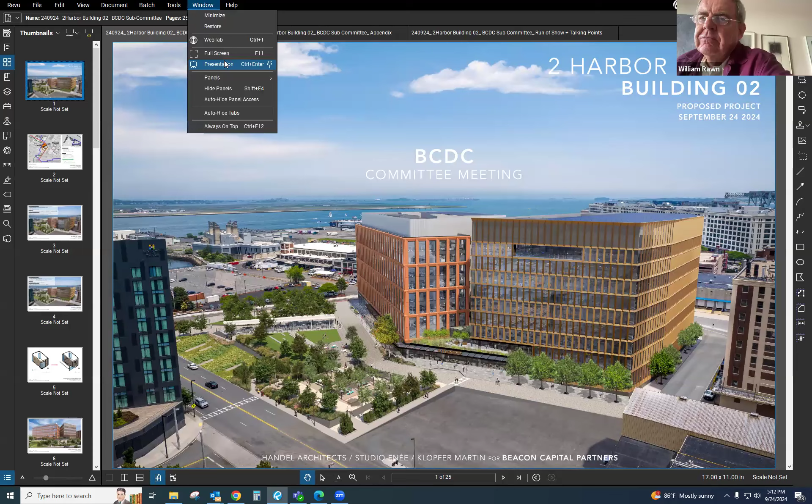I'll get us started, Harry. And I'm Eric Ewer with Beacon Capital. And it's been a little while since we've been in front of you, but we're very pleased to be back in front of you. And I promise we didn't take the summer off.

We've been very busy, and we listened very carefully to the comments you gave us after our first meeting, and it took a little while to digest them. I think most importantly, we took your comments to our landlord, EDIC. And when we had the meeting to talk about keeping the driveway elevated past building 1, past the entrance of building 2, for the various reasons the team will go through based on your comments, everything started. That, coupled with real tenant feedback from the first action we've seen in quite a while.

And that was early summer, late spring, early summer. And then the feedback also from our investors and their approvals to move forward was kind of what was added all together to get the result right here that we're going to present to you. So happy to be back here.

I'm going to turn it over to Eric number 2, Eric Potkin, also here with Beacon, and he'll lead it to the rest of the team. Thanks, Eric. So as Eric mentioned, it's been a little while since we've been in front of BCDC, so just a quick refresher on where we sit on that left map in the larger context of the Seaport area and the Marine Park. And then you can see 2 Harbor Building 1, that's the building that we just recently completed construction on this past summer.

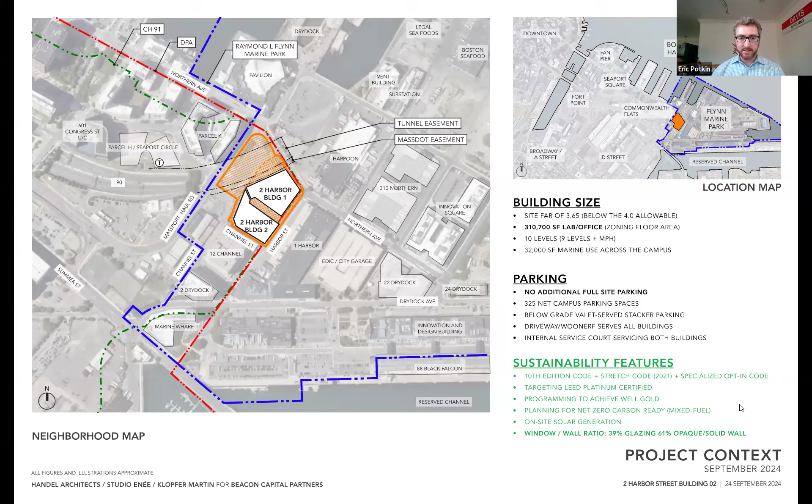So with that context, I'll turn it over to our design team from Handel to start walking through some of the details. Good evening, commissioners, it's Blake Middleton. How are you all? I think we're going to try to summarize.

There were a number of comments that we received in our last meeting with the full commission, and we tried to compress what we understood to be the most urgent and salient ones that would affect our thinking about building massing and particularly the connection to the pedestrian realm. That could be summarized by a couple of things.

One, a request to better understand the relationship between the two buildings. Another very important one was a number of commissioners asking for clarity about exactly how the entry sequence was going to work in the previous scheme, and what the pedestrian experience was going to be like around the perimeter of the site, and in the approach to the building.

We were asked to give more clarity to our thinking about the relationship of the materiality of our building to the Marine Industrial Park, which we'll address this evening.

And as Eric just mentioned, a better understanding of how our building ties into both the requirements for resiliency, and in particular the floor levels around the perimeter of the site and flood protection, and what that impact might be in terms of the sense of public connection at the street level. As we know, we're dealing with this issue in many places in Boston where pedestrian sidewalks and first floors are in different locations and sections.

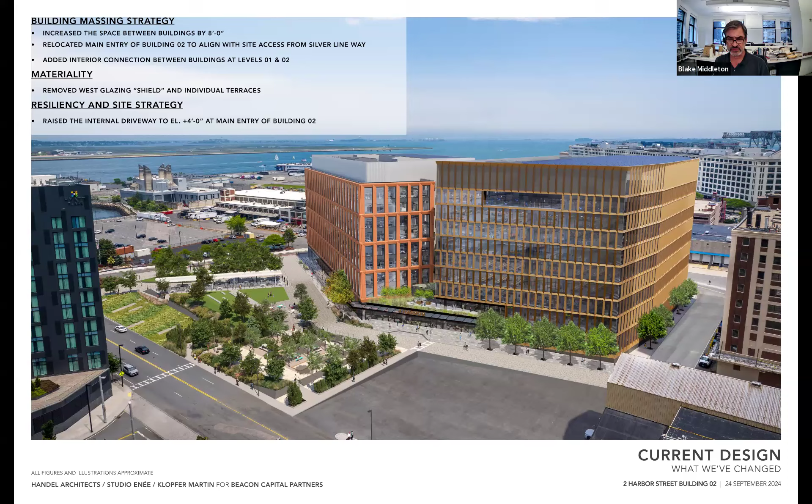Then, as I mentioned before, we raised the whole entry level of Building 2, which was down 4 feet and required all sorts of interior steps and stairs and other things going on at the corner of Building 1. I remember Commissioner Rawn pointed out a number of concerns about what was going on there. So I think we've made a dramatic simplification and clarification about the relationship between the two buildings.

Next, please. In that regard, I think this can be summarized in this diagram here. There were questions at the time about the idea of this shield and balconies, overlooking the entry point, and whether that made sense in terms of how one would orient themselves towards the main entrance of the building, and also the building massing.

So what we've done is reduce the number of perimeter moves and sculpting of the building, simplifying the shape of the building.

We've also reduced the overall footprint of the building by 8 feet, and that has opened up a significant amount of space between Building 1 and Building 2. I think this helps heighten the distinction between them and allows them to be independent buildings, but still tethered together at the ground level.

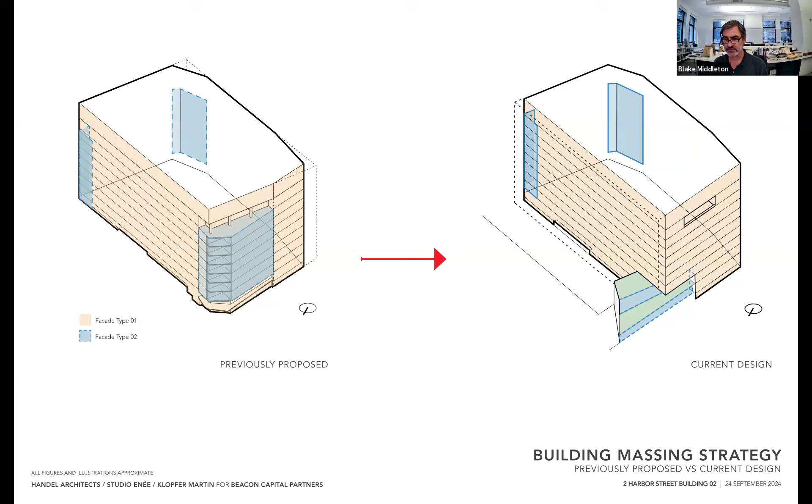We can see that somewhat in this picture here. The idea is really just making a very simple big carve into the texture of the grillage of the facade of Building 2, making that big 2-story cut, which opens itself back out towards Building 1 and draws the eye towards the center of the joint, with the entry door located under a continuous canopy. So the motif and architectural language already established in Building 1 essentially turns the corner and continues in this new joint between the indoor and outdoor space between these two.

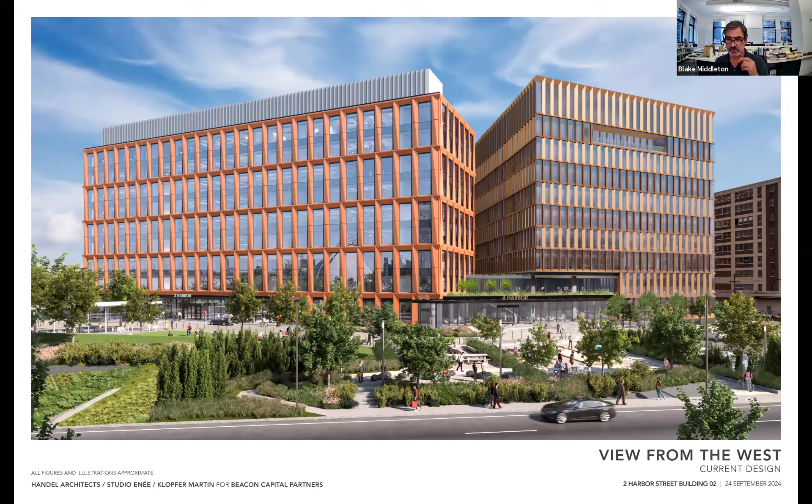Next, please. It's a little hard to tell from this perspective angle, but you have to trust us that the buildings are further apart from each other. I think this helps show the difference, and I would say a positive simplification of what's going on between the two.

We have a very big, bold, simple trabeated facade in building 1, and we wanted to restore that level of simplicity to the building massing on this side of the building on building 2, and let those two buildings both work within that kind of framework.

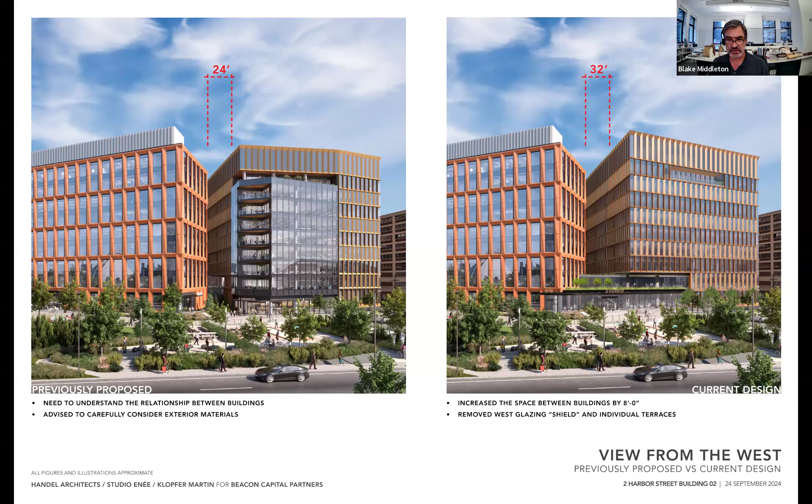Next, please. And with that, I'm going to turn this over to Mark Klopfer. Thanks, Blake. Hello, everybody. This is a drawing that we used a lot in the phase 1 project.

It shows retail or enlivened ground floor edges as they relate to Northern Avenue, making your way across Haul Road into the Ray Flynn Marine Park. The landscape out in front of the phase 1 building becomes a gateway moment. We're reviving this diagram because we think it's really important to the urban design of this parcel.

Here you can see that the 2 Harbor Building 2 piece is really adding to that. The blue lines are showing the major pedestrian connections. One is coming from the new T station, which is going to be at parcel H as that's finished, and then the pedestrian flows coming down Northern Avenue and continuing into the Marine Park.

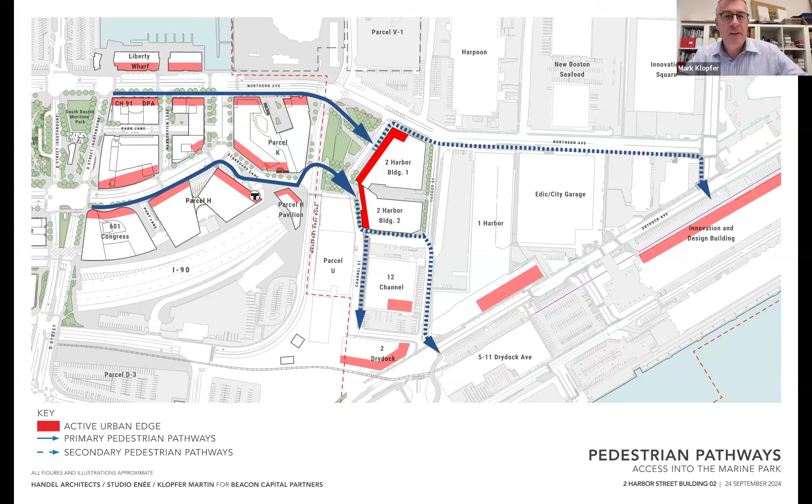As it exists now, building 1 has a ramp that goes down to the street level right as it leaves the parcel. EDIC has allowed a change of that driveway to be lifted so that now it's ramping in front of the new building 2. That removes all kinds of complications we had in the landscape of having an accessible entrance from that lower elevation. So now both lobbies are raised up to this resilient height of elevation 20.5.

Hey, Mark. Yeah, it's Bill. Can you just repeat the last 4 sentences describing this? I was having trouble following your explanation.

Sure, and maybe Harry, go to the next slide. Yeah, or go to the next slide even. Yeah, there we go. Yeah.

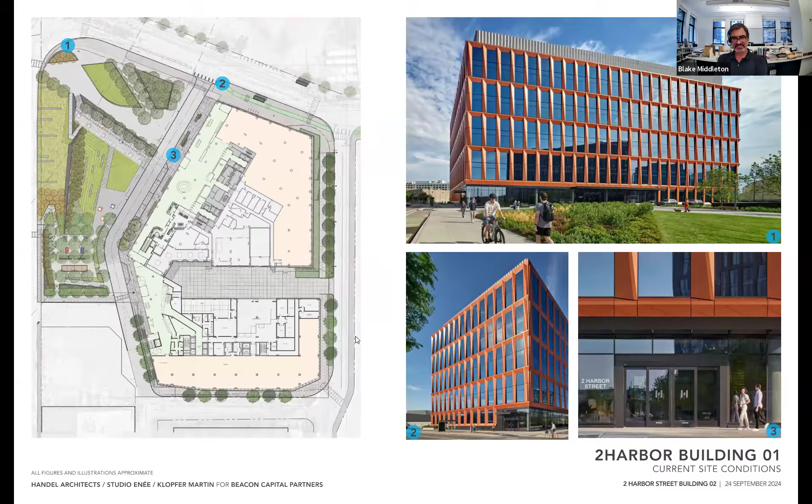The new entrance there, the doorway, the lobby entrance to building 2, is located—Harry, if you want to show where that is located. There's one lay-by space in front of that door. And right after you leave the parcel, you're then ramping down to the existing grade of 16.5 at Channel Street.

Before, we were actually ramping down on our parcel to leave the parcel at 16.5, and that caused all kinds of ramping to happen. So in this scheme, we've taken care of that with the driveway so that both lobbies of the phase 1 building and the phase 2 building are all at the same elevation of 20.5.

Then after you leave the lobby for building 2 and head toward Channel Street, you're sloping back down to existing grade at 16.65 when it hits Channel Street.

There's also a proposed crosswalk across Haul Road, which is part of the phase 1 construction. You can see it in the site plan here. That connection is basically at 17.4, and it also is ramping up from that corner to meet the lobby elevation at 20.5. The site immediately adjacent there is parcel U, which is a future development site.

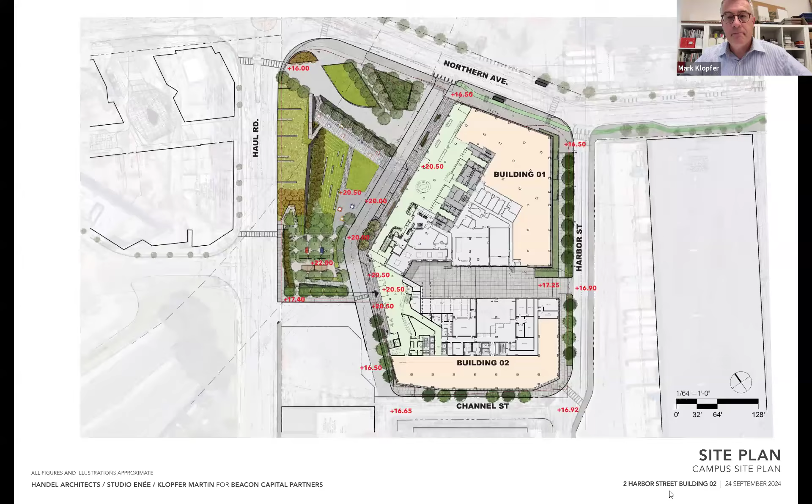So the landscape here is mostly the streetscape around the building—go ahead to the next one. It's fine, Harry. And we are delighted to have the second floor green roof that's connecting building 1 and building 2 over the building lobby entrance. And I think I pass it to Natasha at this point.

Thanks, Mark. Yes, good evening, everyone. So one of the things that we did was connect, as Mark said, connect the 2 buildings, connect the 2 lobbies. The middle entrance is the main entrance to building 2. Here on the left, you see a door that's been relocated from the side for the bikes to come into building 1.

And then there's another entrance on the right-hand side at the end of the glass curtain wall for building 2. We'll show it to you in plan in a second. But the idea is that we would push that entrance back a little bit to create a space that has connection on both levels, on the first level and on the second level.

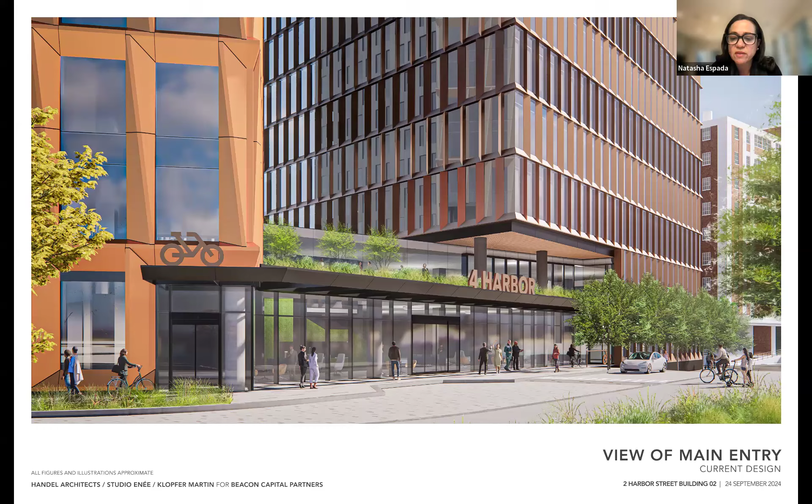With that as a terrace on the second level, as Mark mentioned. So maybe we should go to the next one to see the difference between where we were before and where we are now. The before one, we had a kind of corner entrance. The buildings did not connect. We needed to understand, and some comments we got from you were, where's the main entry?

We need to understand how the project facilitates connectivity, and what is the building's approach to resiliency and flood protection, because we were coming into the first floor. On the right-hand side is the current design, relocating the main entry to be between the two buildings, and the two levels to be at the same location at 4 feet above grade level, and then raising the internal driveway to that same level at the main entry of the building.

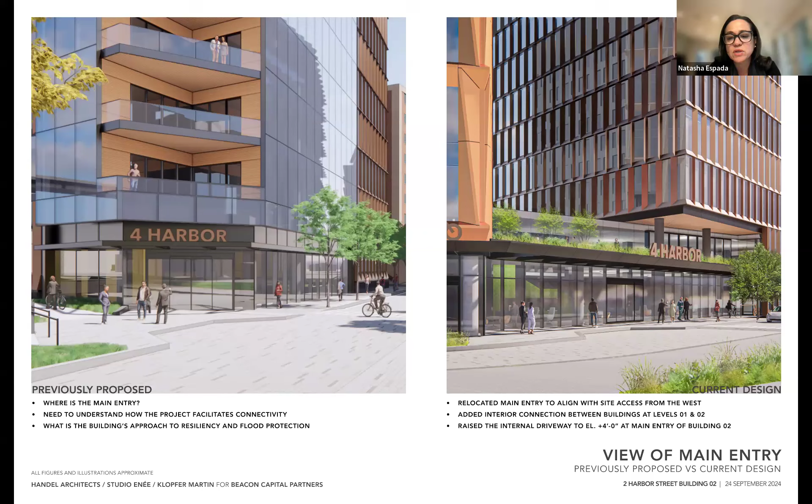And so here is a resiliency strategy. On the left-hand side is the previously proposed design. What you see at this pink corner, and maybe Harry you can point to that, was the old lobby. So the entire floor would be at plus 4, but the lobby was at 0. And then in the back, there's the blue additional protection for the critical infrastructure. The pink in the middle of the site is the protected area below resiliency, which is the loading docks.

Now, the current design brings the new lobby so the entire first floor is all at plus 4. The loading dock is still at grade level, but the additional protection for critical infrastructure is still at plus 5.

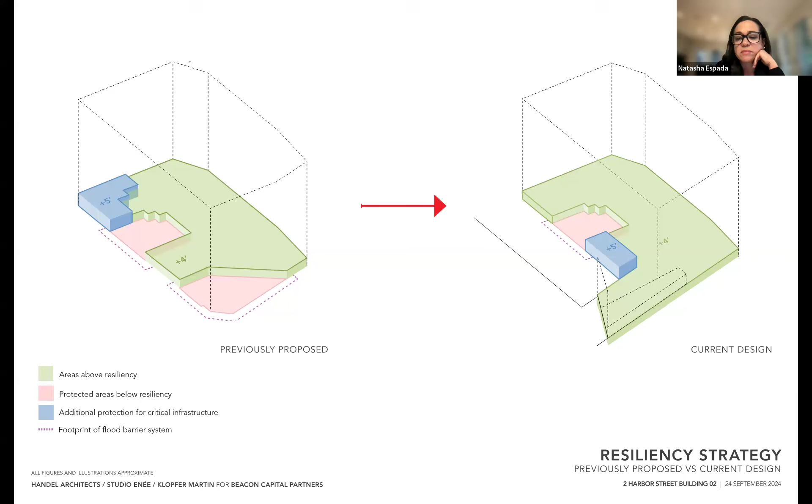And then the next slide shows, on the left-hand side, the entire campus plan, and on the right-hand side, the blow up of the new lobby. On the left-hand side, we can see the lobby for building 1 and the lobby for building 2, as they connect, kind of in the center, in that central core where you have the entrance, as Mark had mentioned.

And then if you go to the blow up on the right-hand side, you see the entrance, the large red arrow is the entrance to the vestibule, with right in front of you the main front desk. And then on the bottom part is the cafe. There is the security area that leads you to the elevators. Right behind it is also a connecting stair to the upper level.

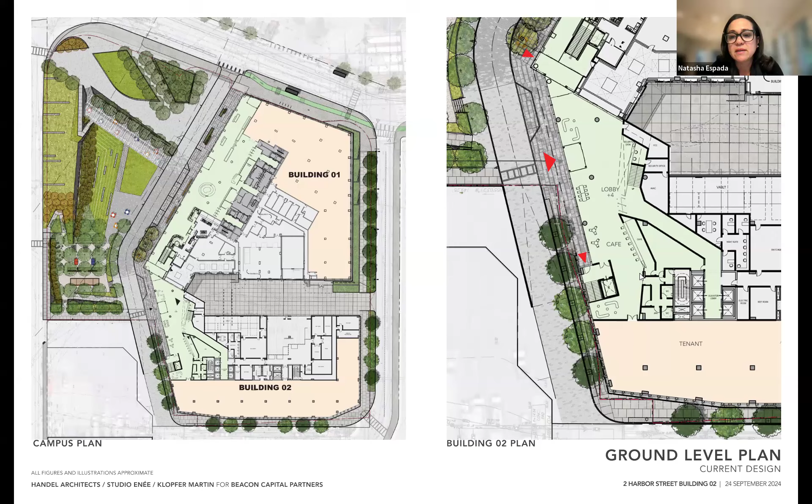But we have this great opportunity to have all of the lounge spaces against the curtain wall, against the street. And then at the bottom of the plan is the entrance to the bike room for building 2. On the upper side, you see the entrance to the bike room for building 1. And then the tenant space in the bottom.

So here is the second level, and you can see here on the left-hand side, the peach color is the tenant space. And on the campus plan, you can see that we have a terrace already on building 1 that's built, and there would be a new terrace at the connector piece.

The area in building 1 has amenity spaces that are wellness focused. So it's the gym, the yoga room, a conference room. There would be an additional conference center right there.

The conference center. And then there would be a connection to building 2 where there would be the communicating stair that's within the security area. And then there would be a lounge space and opportunity for different types of wellness areas, including maker spaces. It could be tech-free zones, recreation in building 2, so it would complement building 1. And then there would be the terrace area where all of these spaces could connect, especially during the nicer months, and open up and become a larger space to activate the street.

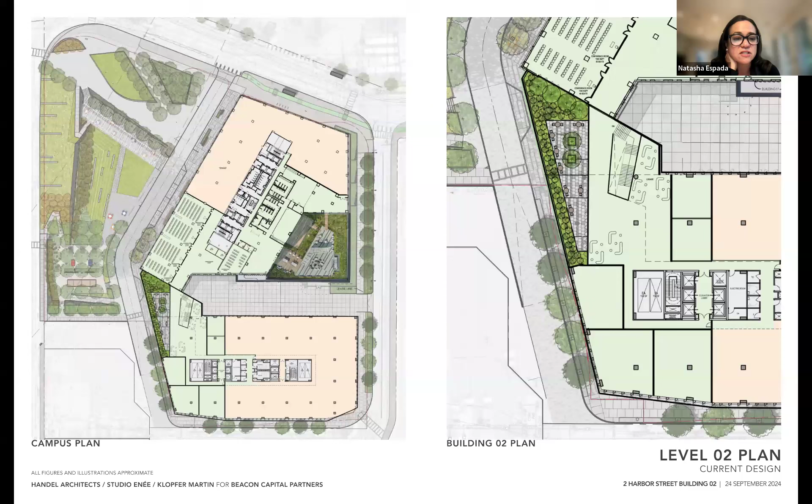And then the next plan is kind of a view of it, looking at Harbor Street, and I'm going to hand it back over to our team.

So one of the things about Harbor Street is we have a really robust streetscape on phase 1, and we're continuing that into phase 2 as well. There was some reconstruction of the road as part of the phase 1 construction there. And the next one.

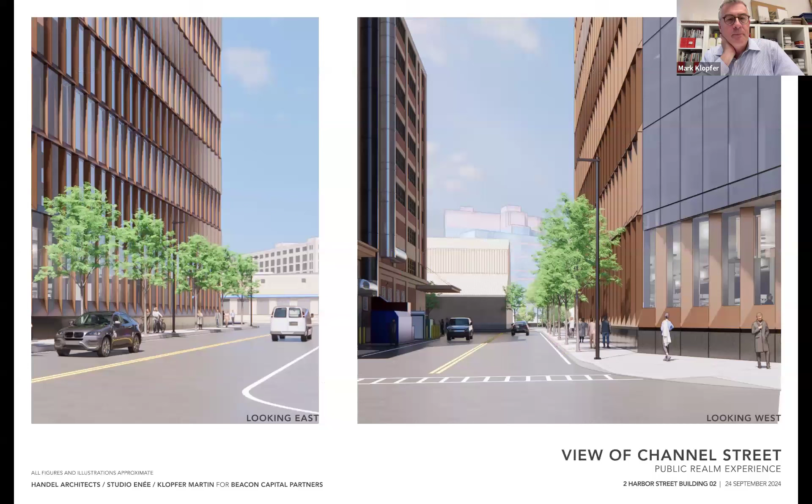And this is the view on Channel Street. So this was also a street that was very much reconfigured in the phase 1 process. Even though the building doesn't sit that close to this edge, it was part of the construction that we did. This had really been an alley previously.

We've constructed it as a proper street with a curb and a sidewalk. In this phase, we're adding street trees so it really becomes a proper city street. It used to just be a fire lane, actually.

I'm seeing a time check and I'm acutely aware of that, so I'm going to move quickly.

The issue of materiality was brought up in the first meeting. It's a reminder of the inspiration that led to the design of Building 1, the Marine Industrial Park—literally industrial, and certainly marine—and the use of robust materials and trabeated frames. That language, endemic to the context, is fueling our thinking about the materiality of the next building.

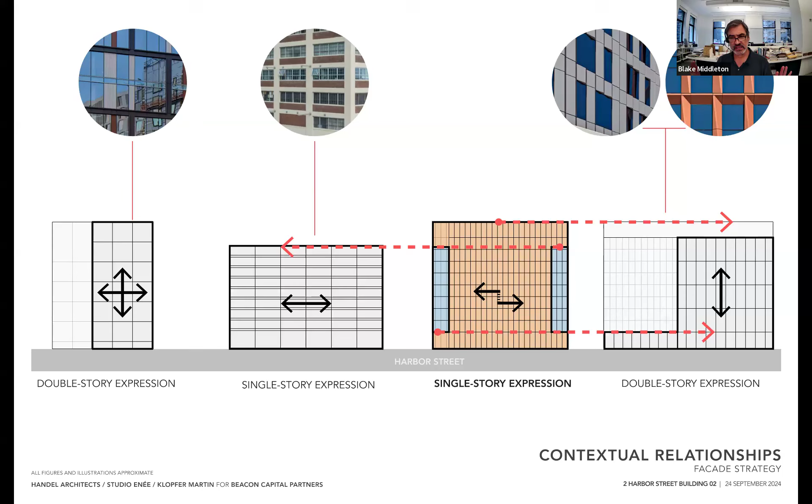There was also discussion about the relationship of building massing and architectural expression, the frame expression. What's interesting is that from right to left, Building 1 on our site has a single-story expression, and each of these buildings tends to be super simple in formatting, orienting either vertically or horizontally. To some degree, what we're doing is allowing that shear between the two to come together in the expression of the frame system, onto which we've applied the pilaster system for Building 2 next.

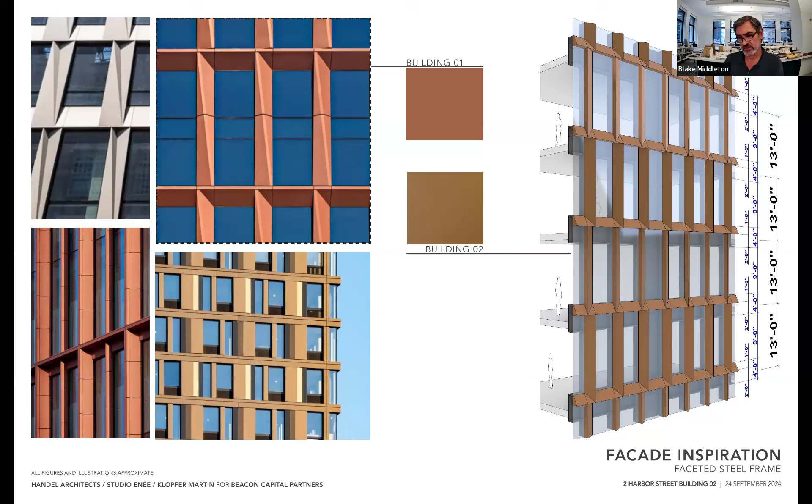The goal here is a much deeper and darker tone—not trying to replicate what we've already done in Building 1, but still building off these elemental materials that shimmer in different ways in the light as the surfaces are torqued one way or the other.

I'm going to end right there because I know you guys are eager to give us some hopefully helpful guidance on next steps. Thank you. Thanks, great—Blake and team.

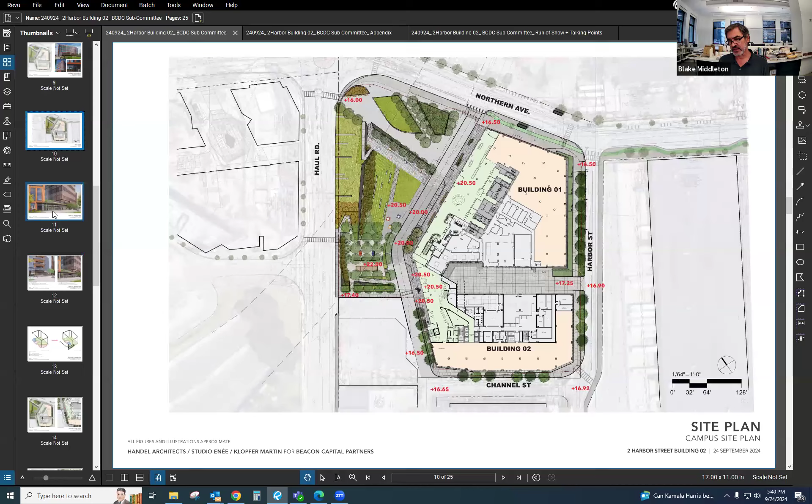Right now if you go out there, you'll notice 12 Channel just to the south - you can see the outline there, it sets way back. There's a big kink in the road, and then it does another funky adjustment as you head further south. Our thought is that this street can be a little more episodic. Something may completely change right across the street at some point, because right now that's all a big, long, open truck dock and staging area. So who knows what's going to occur there in the future.

We tried to take advantage of that condition and actually create that one band of vertical glazing cut open into the frame, because we see that as an important location for meeting rooms and the sort. That corner, because of the offset, also takes advantage of some wonderful view corridors looking back out to the harbor. It was a way to respond to that offset and let it become kind of a bay window at a key jog.

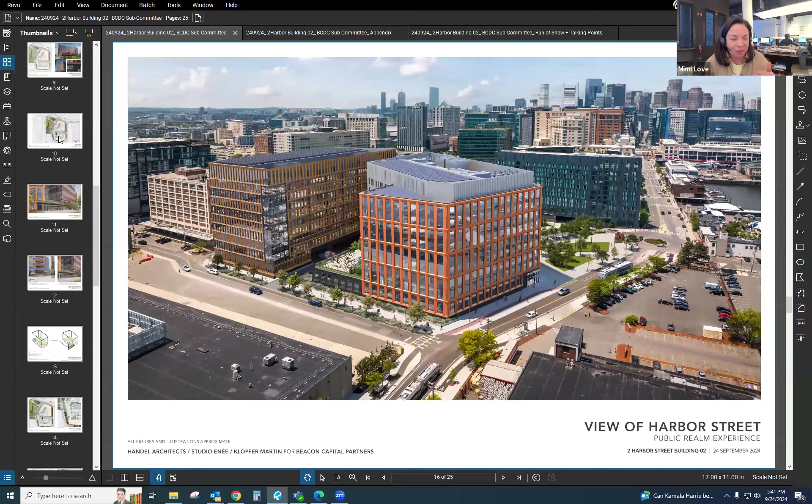But Blake, does the ground floor align or does it set back? I can see where the bay window is, and I don't know if it's a trick of the eye in this perspective - I'm just curious along the ground floor of Harbor, does it not align? So the planting zone in building 1, which is built, is pretty much in alignment with the face of building 2. Yeah, but in that perspective it looked like the base might be set back from the rest of the building above.

And I just - yeah, early on in the old scheme there was a whole bunch of complicated cantilevering going on here, and we've eliminated all of that.

I would be an advocate of looking at that streetscape condition again. It's a particular concern I have in the Seaport area, that the urban fabric doesn't have a pedestrian feel to it. I'd encourage the team to look at that and see if there's a way to manage the alignment Mimi's talking about.

I think the last time I saw this project was a while ago, because if my memory serves correct, there was a wall in the landscape, or a garage there. So it was a long time ago that I saw this. And I do appreciate the landscape planning strategies along Haul Road. I think that makes a lot of sense, Mark, the things you guys have done.

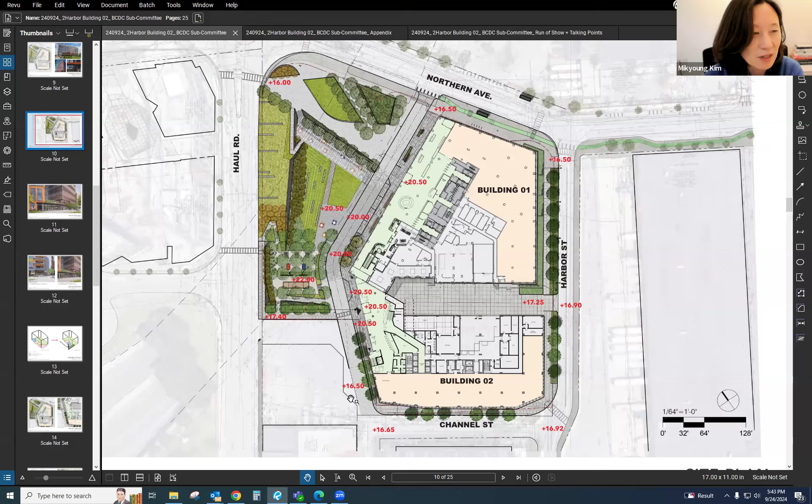I do have a question about that intersection, the corner of Haul Road and Northern Ave. It might be helpful to have a circulation diagram, because when I look at it, there's something about coming across those two crosswalks and the shapes of those planters that I wonder if you could explain to us, and maybe study a little further how the shapes of the plazas emerge from that entry point.

So I look at one of the ramps close parallel to Haul Road where it says 16, and you come up to the plaza. I'm a little confused about north, right against that plaza with the planters on Northern Ave, and wondered if there's an opportunity to take a look at that again, to clarify the relationship of the urban edge to the entry pieces, to the notion of creating gathering space.

There's a kind of quality to some of the plaza spaces. I really like Plan South, elevation 22, where in the perspective you can see there's a ramp that takes you up and then this plaza, and there's something very nice about the relationship of the building to about two-thirds of the site with that canopy structure as well. So I'd just ask that you take a look at the urban street edge and this semi-plaza condition at elevation 16 a bit more.

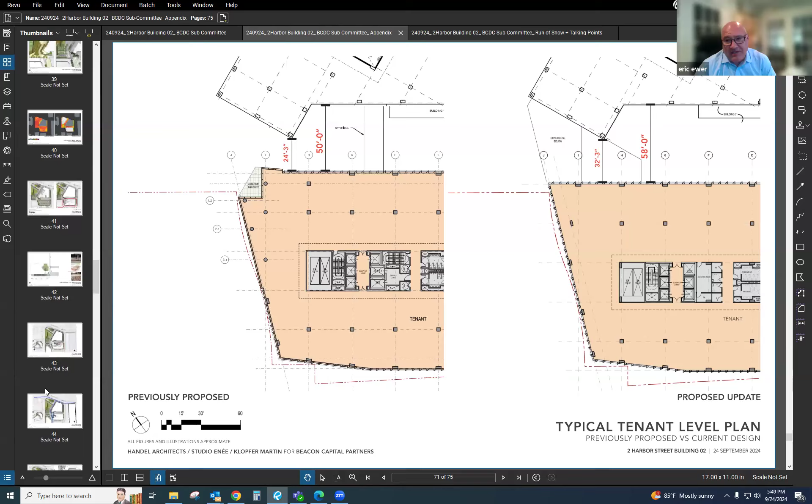That corner there, that's such an opportunity. But still, even with this drawing, we've sent it out to everybody saying, hey, we're trying to get everybody to communicate and agree. Are we really close? And it's been crickets, nothing back.

If we don't have it here, we can send that around. That would be so great, I would really appreciate it. Thank you. But I do like the way you've graded from Haul Road up in a more gentle way, and you're not creating these urban walls. I think strategically that's really smart, and raising the building to meet the landscape better. There's a lot of really strong things in this updated proposal.

Thanks. The line of trees that comes from the main entrance to building 1 is put in temporarily. They're going to be lifted up on a promenade that's shown here. So really the plaza north of that line of trees has somewhat been recreated, although that little piece by the +16 is different because of the existing circulation between those crosswalks.

We'll have a current aerial next time we present this, so you can see what the temporary condition looks like. For these impactful, important projects, if you have time, it might be nice to zoom out a little so you can see how everything, and how the future of Haul Road, fits together strategically to understand it better.

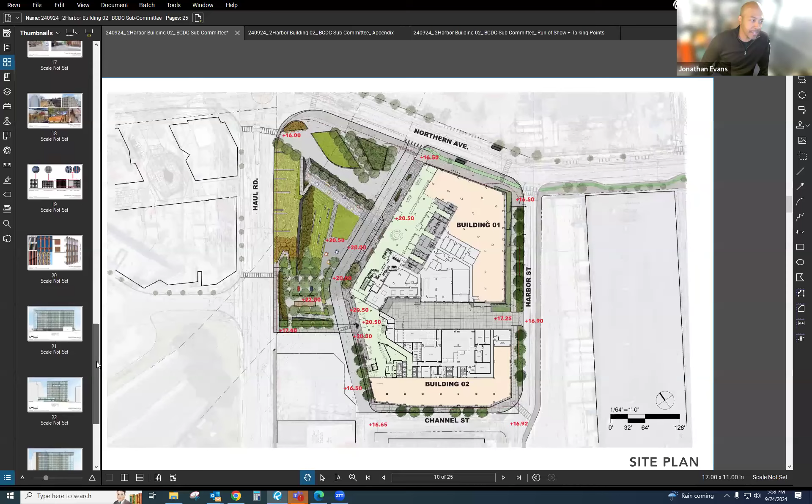Shifting gears, kind of way back to the exterior, again picking up off of Bill's comment, I think the overall massing facade articulation is really handsome and elegant and really exciting. I just have one general question, understanding the sort of rigor of the facade diagram. How does that logic inform any attitude about the mechanical screening, which is also a pretty prominent part of the facade? Is there any thought of actually bringing that same language up and having that frame become the language of the mechanical screen?

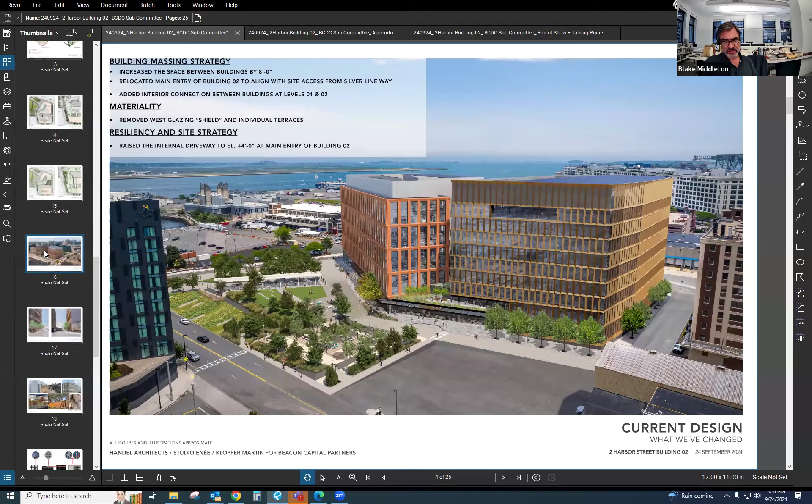Well, the answer is yes, and it is. I think, if I understood your question correctly, looking at the building, we're intentionally, there's some drivers here that are important to understand. We actually needed to, in simplifying the building massing, not duplicate the attic story motif. And there's plenty of precedent around town for that kind of thing.

We are also maximizing and capturing as much roof area as possible. We have some very serious electrification, future-proofing for full electrification requirements in the code, and this allows us to capture all the available area up there. But yeah, the idea is that the lattice, if you will, is basically from ground to roof line. Most of that will be spandrel glass, but some of it will also be louvers, mostly on the south side where the enclosed mechanical space is. I think we showed that in our elevation drawings that we submitted.

Does that answer your question? No, yeah, it does. I was looking at building one. Oh, I see. Yeah, that was a whole different concept of interlocking volumes and different, less constraints than we have on site for building two.

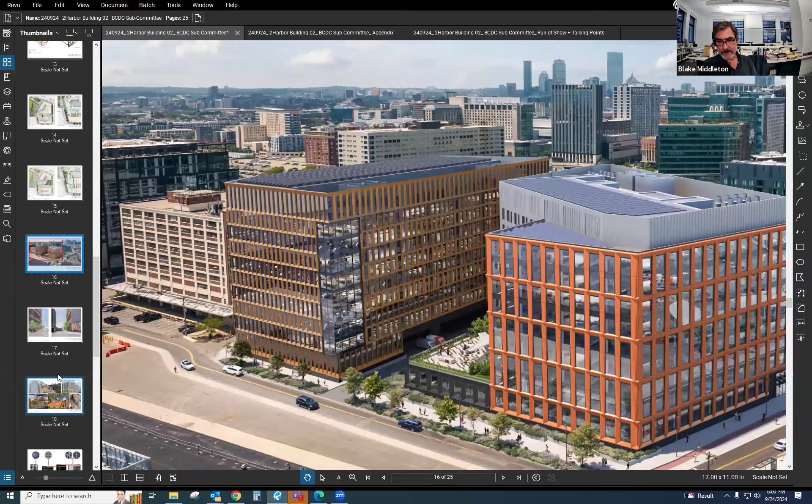Just to circle back to the comments from Bill and Amy earlier, I would probably agree that that glass knuckle is an opportunity for a little bit more iteration. It's funny, I feel like you could perhaps consider a two-story expression of that glass, but then you would lose that step-back terrace. And maybe that depth of the overhang could be reconsidered to be less deep, to actually pull that glass up a little bit more, just to make that a little more prominent. But overall, I think there's a lot to like about the architecture here.

Just a quick response, because I think Bill may have brought this up also. We looked at the idea of the classic link between building one, building two, and a little object in between. And that seemed to create some interior artificial conditions that weren't making much sense. In fact, the relationship between the existing building and the new building became a little fraught with that classic solution, but there was no need for a large interior two-story volume in there. It was really important to try to create this green overlook and extend as much as possible the sense of natural vegetation around the perimeter of the site.

We have no control over what happens directly opposite us on parcel U. As Mark mentioned, it's a future development site. There was some submission for that, but I don't know if it's gone forward through BCDC yet. So we're trying to make the most out of this and create that characteristic ambiance for a life sciences office building of this nature.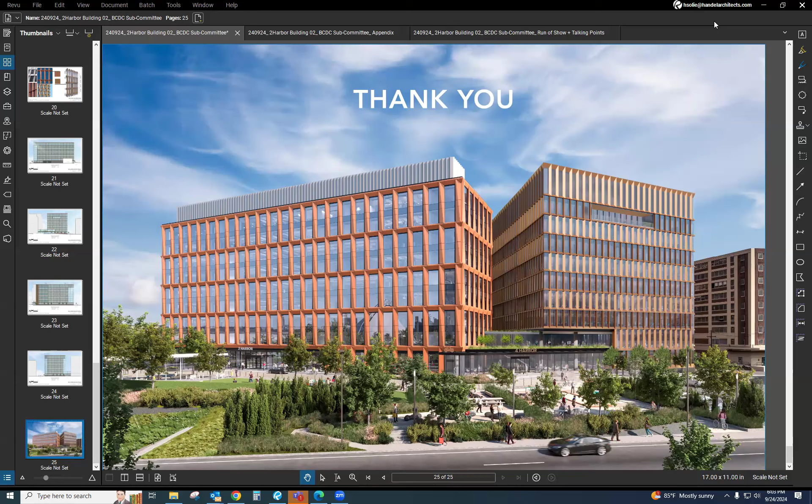Commissioners, at this time, I think the only hand raised here is Bill Ron. And I think I'm seeing that in the attendance, it's just staff and proponent teams. So I'll consider the comment period closed.

Okay, all right. Well, we have to make a decision. I think there were comments around 3 particular areas, possibly 4. One is thinking about the resolution of this entry, but the general approach seems right. I don't know if it's fussing with the geometry, or we'll let you think about what the right solution is.

I think we talked about the other front as it was referenced in terms of the street alignment. Is there something that you could do there? Laura mentioned some landscape ideas along this long continuous road.

I think these comments are manageable, but I just want to know from the commissioners, are we ready to take this to full commission? Would you like to see this project again, some of these revisions in subcommittee again?

Well, in regard to my first comment, I'm certainly happy for this to go to commission. I think that the planning department can deal with any of those issues perfectly fine. And in fact, I think the building's so good that I wouldn't want to slow it down. As to the others, I leave that to the commissioners who brought those forward.

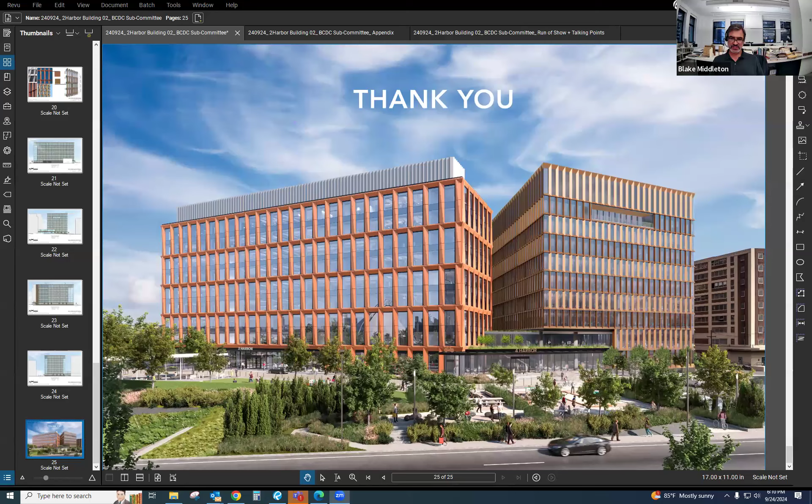If I can have a parting observation about that, one of the reasons we didn't go literally with a traditional glass box there - this is a west-facing facade, and it will become a serious, interesting challenge dealing with afternoon daylight and heat gain in a building that is actually trying to do its best to mitigate all those kinds of conditions. So the consequence of that may quickly lead to something that's not necessarily transparent. It becomes pretty solid or opaque or translucent in a way that may or may not be very satisfactory. But we hear and understand everything you're observing here, and we could share many sketches that went through this, but this approach from a planning point of view, and we think even an urban design point of view, actually helps resolve a series of internal issues with the external one.

But I completely agree that the front door needs to be - the statement needs to be clearer and more articulated. But we'll go at it.

Yeah, it also allowed for the shared second floor terrace. I do think it needs development. I'm just saying there was something really nice about that terrace, to be able to occupy that building for some months of the year outside and open it up. So we have to figure out - we understand your comments, we don't disagree. It's just a matter of figuring out how can we make it the best possible.

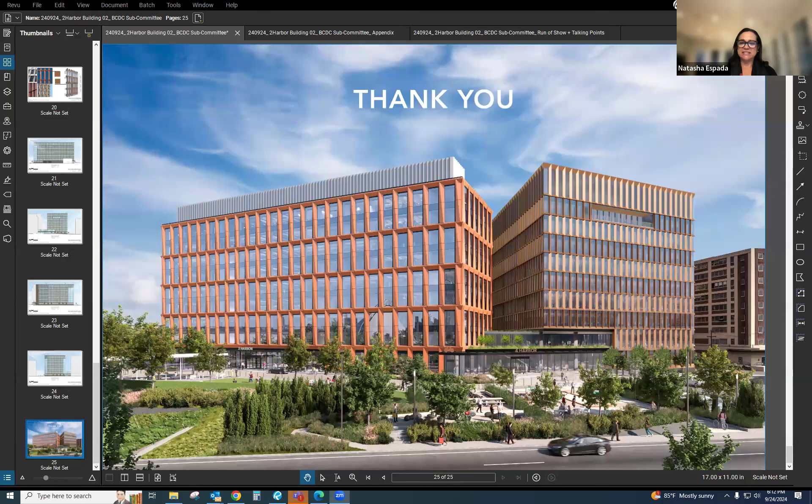All right, and with that, we'll look for the best possible when it comes back to full commission. Always the best, Mimi. All right.